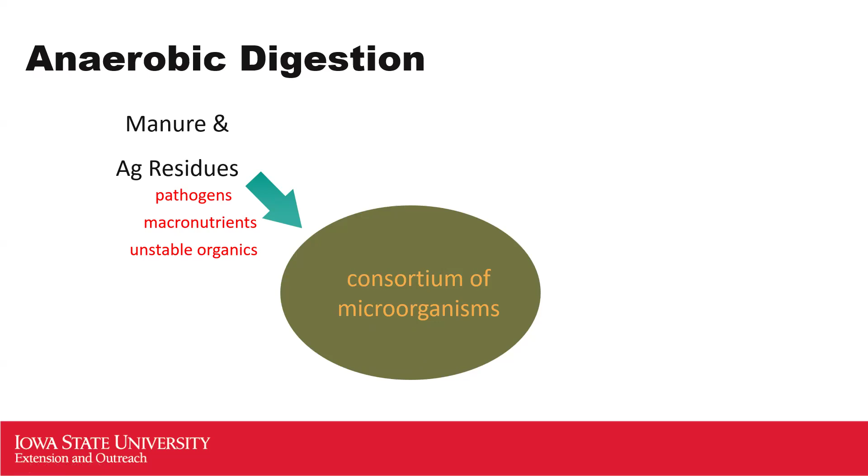So in manures, that might be things like pathogens or macronutrients like nitrogen, phosphorus, or potassium. But it's really that unstable organic matter, that carbon, that's of most interest to us. And that's really the input. And what we're trying to do is put it in a tank and store it in a certain way that limits air intrusion. So we don't want oxygen in there, essentially. And then we need to get a population of microbes that can do their stuff on this and break it down.

And what comes out then is something that we'd call treated effluent, right? And in many ways, it's not that different from the manure we start with. There'll be less organic matter, less carbon in it. But for the most part, the nitrogen, phosphorus, and potassium that we start with pass right through. And that's both a blessing and a curse, right?

If we were thinking about, can anaerobic digestion change nutrients on my farm, right? Can it work as a nutrient treatment system so that I don't have as much manure to apply, or I don't need as much land? It's probably not accomplishing that goal for us.

On the other hand, if we're in the Midwest and we're thinking about manure as a fertilizer product, treating it through an anaerobic digester doesn't do much to reduce the fertilizer value, right? It still has all that nitrogen, phosphorus, and potassium. And what it's really done is move some of it to be more available right away when we take it out of the digester. And that can be an opportunity for us.

The other thing that we tend to see is it's a great tool for reducing pathogens in the manure. And that's not something we tend to regulate on, but it is something that I think people are concerned about. Where are these pathogens in the manure? What's the risk to people or the environment? And having something we can do on farm to reduce that number can be beneficial.

I've been working on some research projects here with antibiotic resistant bacteria, and we see a similar trend that treating in an anaerobic digester, for whatever reason, seems to lower the amount of antibiotic resistant bacteria that remain in the manure. As I mentioned, it's still nutrient rich, or at least as nutrient rich as it was.

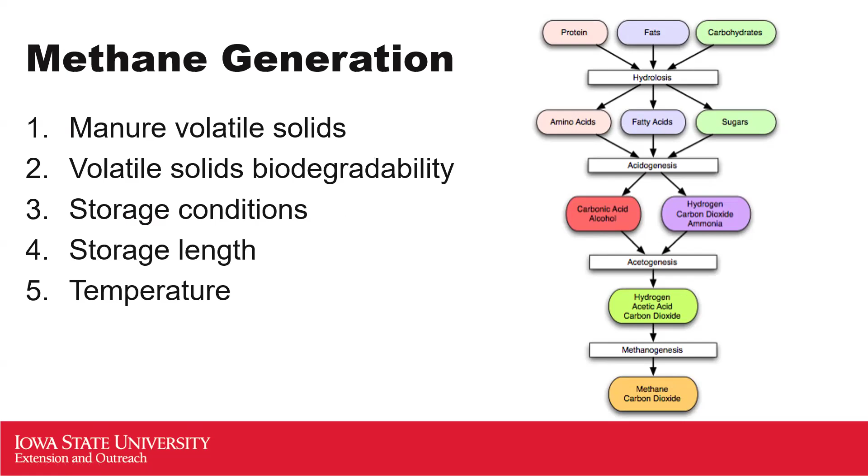I wanted to cover some processing advantages and maybe some disadvantages of anaerobic digestion. And the first one is that it can be messy, right? So non-sterile reaction vessels. And you might say, well, that doesn't sound like a huge advantage to me. But if you work in the world of manure, it really is, right? It's loaded with bacteria to start with. And thinking about getting to a pure single strain is extremely difficult. So when we compare what we're doing with maybe something like ethanol production, where they have that single strain and they need sterile reaction vessels to avoid off products, well, we don't have to do that, right? We can take dirty stuff and really get that treatment.

Another big advantage we have is automatic product separation. So when we see some of those ethanol plants and they're doing distillation and have big columns and need to add lots of heat, we don't have to do that necessarily, right? The gas, that methane, is basically insoluble in water, so it's going to naturally off gas from that material, and we get this natural product separation. Now, if we want to make it pure enough to put in a pipeline, certainly we have to do some post-processing of that gas, but at least our initial separation is relatively simple.

And the other thing that I think has historically been appealing is its relatively simple equipment and operations. Now, certainly there are things that can go wrong. I'm not trying to say it will always go perfectly, and there's definitely things that we can do to optimize the situation. But it is a process that occurs naturally. In a deep pit barn, where our swine manure is falling through the slats stored in that pit, there is methane coming off of that manure continuously. So really, when we say, can you mess up a digester?

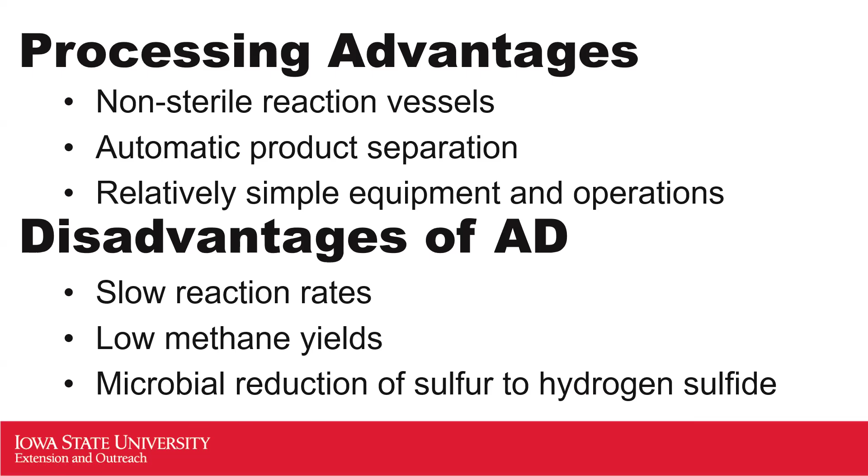And then the last one is really turning that sulfur into hydrogen sulfide. Mostly that tends to be an issue in terms of treating and removing that hydrogen sulfide. There are some safety risks associated with hydrogen sulfide and confined spaces, so it's something we have to be aware of. But really, from an operation standpoint, the risk is more: how do we get it out of the gas and get the gas clean enough to use?

I promised you a little bit on process and how long it takes, and just a couple to compare it to. So if you think about traditional corn grain ethanol fermentation, that's about a 2-day process, give or take, right? So relatively quick. If we think about making biodiesel, that might be a 2-hour process, so again, super rapid. In terms of anaerobic digestion, a much slower fermentation, if you start with something really easy, like a sugary wastewater and a sophisticated digester, you might get your reaction time down to the order of 8 hours or so.

If we start talking about how long it takes manures to digest, we might be in that 20 to 100 day window, with 20 to 30 days probably being what we've typically chosen. As we think about alternative feedstocks, for example corn stover or prairie grasses or cover crops, we have much less experience in that. Some of those products might take more time to degrade depending on the makeup of what's there.

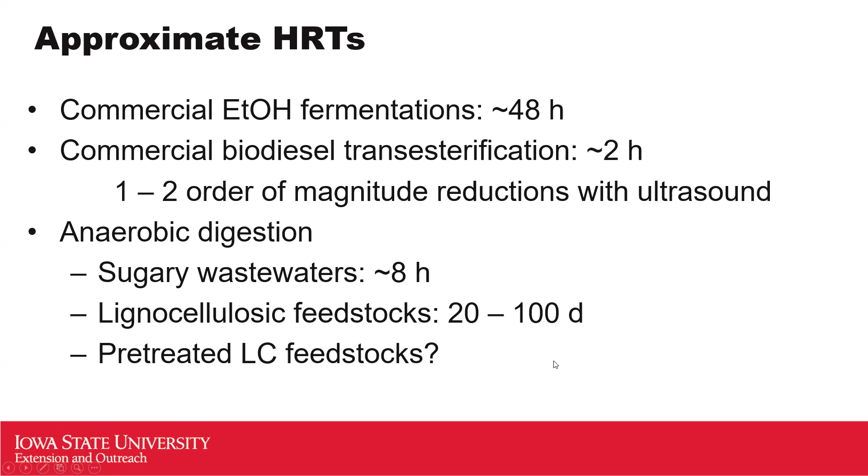One of the things you'll probably hear a fair amount about if you start studying anaerobic digesters is we have to figure out how much gas we're going to make. There's a couple ways to do that, but one of the most common is something called the biochemical methane potential. Essentially it just measures the digestibility of a substrate. So you start with some inoculum, which is a fancy way of saying, hey, I have this anaerobic digester and I took some stuff out. You make mini reactor vessels, put a small amount of whatever substrate you're testing in, and then somehow measure the amount of gas and methane that you're making, right?

We had a question: are there environmental issues with H2S in the gas? Don't you want to keep the sulfur in the liquid? We'd love to keep the sulfur in the liquid, and there are some ways to do that. I mentioned one earlier. You can bleed in small amounts of oxygen or air to try and reoxidize that sulfur and put it back in the liquid.

And then there's some other ways to treat it. One that's relatively common is using an iron sponge on that gas cleanup side. So the sulfur essentially reacts with the iron and we can pull it out of the gas. We really don't want to off-gas H2S if we can help it on our processing system.

Certainly, when we've looked at cropping systems in Iowa, there's a demand for that sulfur, right? So we often talk about nitrogen, phosphorus, and potassium, but sulfur is the fourth most valuable compound in manure. So we want to keep as much of it in the liquid as we can. And even though I'm mentioning hydrogen sulfide and saying there's issues with it, when we think about what fraction of sulfur is coming out as hydrogen sulfide in the gas, it's still actually relatively small.

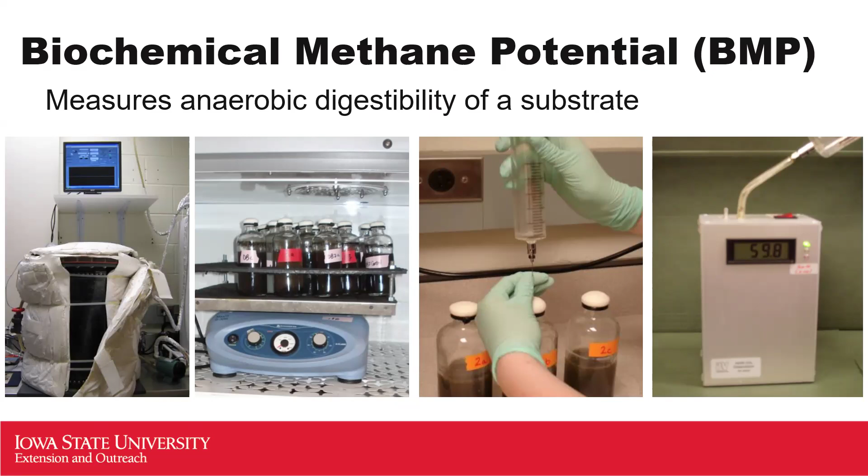There are some government reporting if you're a non-agricultural entity on hydrogen sulfide emissions, but absolutely, people are trying to keep as much of it in the digester liquid as they can and minimizing what's in the gas, because cleaning it out of the gas can be a more expensive part of the cleanup process.

I wanted to give you an example of what you can learn from running some of those BMPs. So this was just a swine feeding trial we did here at Iowa State. We fed 3 different rations. So that's sort of what that middle designator would be. SBM would be corn soybean meal rations, right? So that would have been what we considered a typical ration before we had distiller's grain.

Corn DDGS, that would be corn with the distiller's grain in the ration. And then corn SH would be corn with soy hulls as a ration. Not as common, but in that case, we wanted to see what fiber was doing. So we fed a different fiber relative to that corn distiller's grains. The designator on the end is just a designator for how we were grinding the diet, either coarse, which is about 700 microns, or fine, which is 350 microns. And really the swine industry has moved towards that finer grind because it improves feed digestibility by the pig.

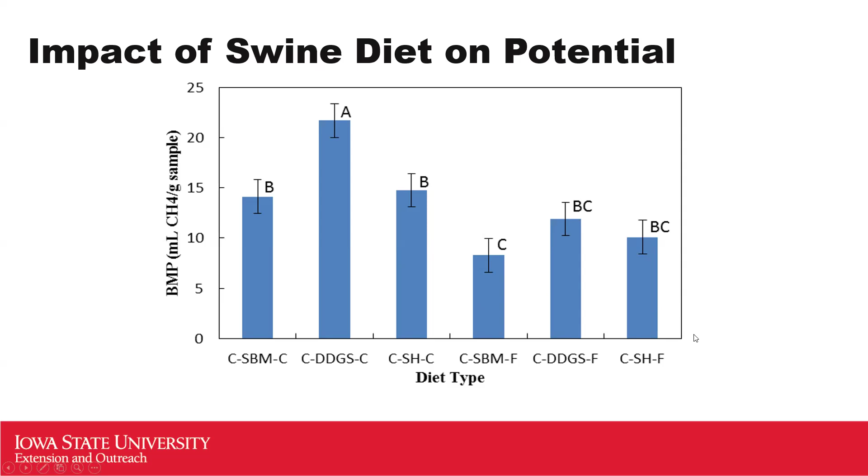And what I wanted to illustrate here is a couple things. One, feeding distiller's grains, right, tends to increase the amount of methane potential we have in swine manure. The other thing to note is that by grinding finer and getting better digestibility in the pig, we end up with less in the manure, right? So it's certainly, if we're feeding pigs, that's what we want. But if you're showing up and saying, I want to run a digester on this manure, how much gas am I going to make? As we do better with pig performance and feed improvements, we're probably going to have less potential coming out of that pig in terms of what's left in the manure.

There's another way to do it, and for a first really quick test, chemical oxygen demand is something that you can get many labs, commercial labs, to run for you. And we know that for every kilogram of chemical oxygen demand that you can break down in an anaerobic digestion process, you should make about 0.35 cubic meters of methane. So if you want to say, do I have a material that this even makes sense for, that's often a good place to start because it's a quick, easy test.

The art really is in estimating how good we're going to do in removing that chemical oxygen demand during treatment in a digester. And that answer is it depends a lot on the quality of the organic material in it. If it's sugar water, you can probably get most of it to break down. If it's really lignocellulosic material with a lot of lignin, we aren't going to do as good a job of breaking it down. And that's where that biochemical test really can come in handy to help know a little bit better.

And then I wanted to just show a few pictures as we got started. We'll hit these a little more in detail on our integrating on the farm. But there's really basically 5 processes that we're trying to handle, right? And that's feedstocks, both getting them to our digester and making sure they're pre-treated appropriately, talking through some digesters, and then some back-end handling for what's coming out, both the gas and the liquid.

So as we think about layout on a farm and what we might be doing, this will certainly depend on what your farm looks like and your overall goals, but we might need something for our storage of other materials coming in. We have to somehow get our manure into this digester, depending on what we're adding, especially if we're adding other materials. We might need to do some post-separation, right, and generate some of the solids and liquids and keeping them separate, have to store the liquids somewhere.

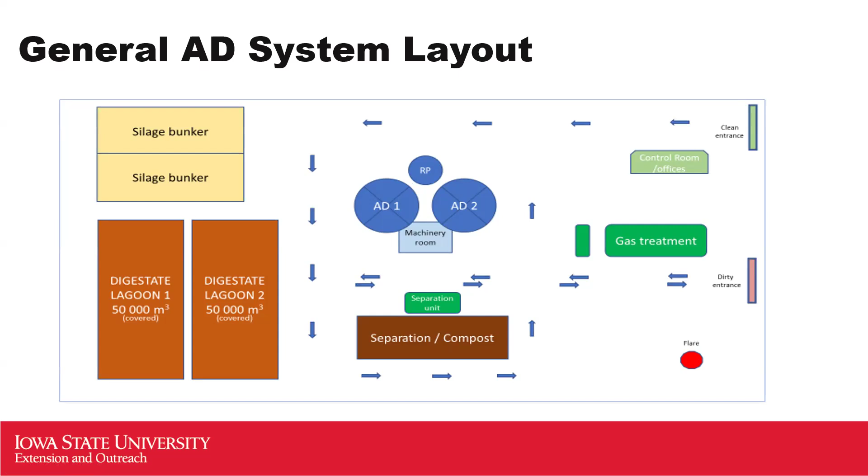And then it separates the HRT, that hydraulic retention time, from the SRT, or the solids retention time. And really what we're trying to do in a digester is keep the organic matter in it as long as possible to give the bacteria more time to break it down. And in many ways, separating that hydraulic retention time and the organic matter retention time can be beneficial, right? We're going to keep the organic material in and let that water come out. The big disadvantages here are it's relatively slow conversion.

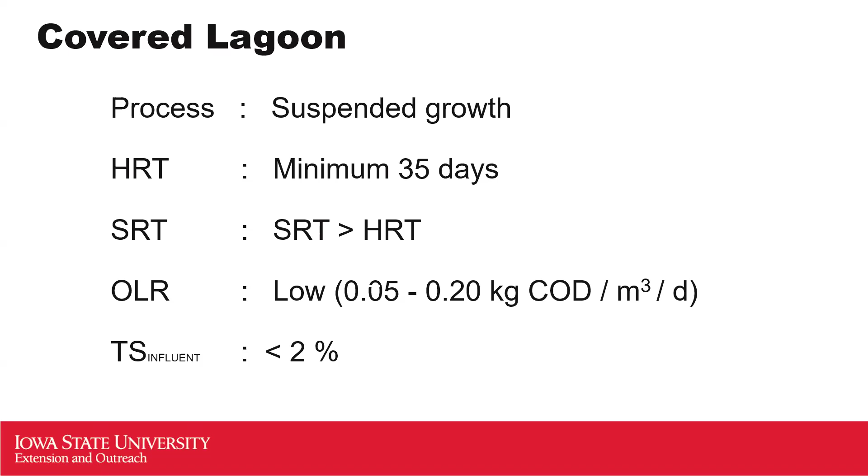agitated in it. The big advantage of these is we start to work with things that can have higher solids content in them. Generally, we think of up to around 10%, maybe to 12% solids, depending on the type of mixing you're using. And these have seen a lot of industrial or municipal use application.

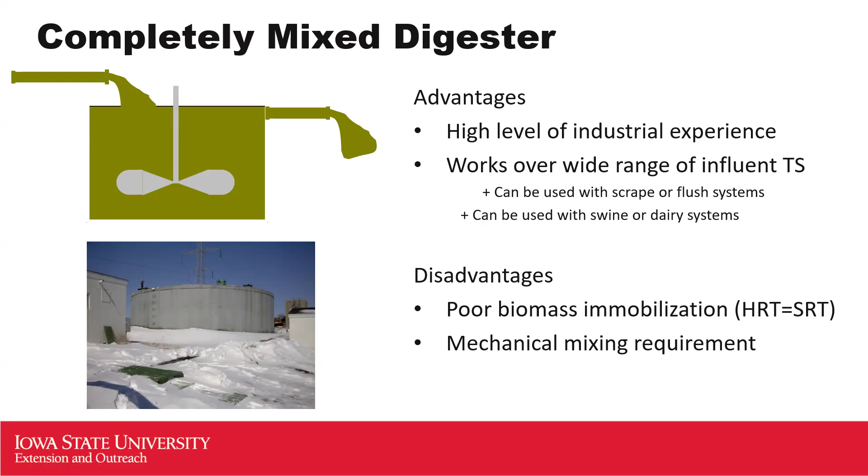The disadvantage here is we do a relatively poor job of biomass immobilization, right? So we don't want stuff to settle out. We're trying to keep it mixed up there so that the whole reactor is more productive in making materials. And that tends to make the hydraulic retention time and the solids retention time exactly the same. So we don't get the advantage of separating the liquid from the solids and building our reactor a little smaller.

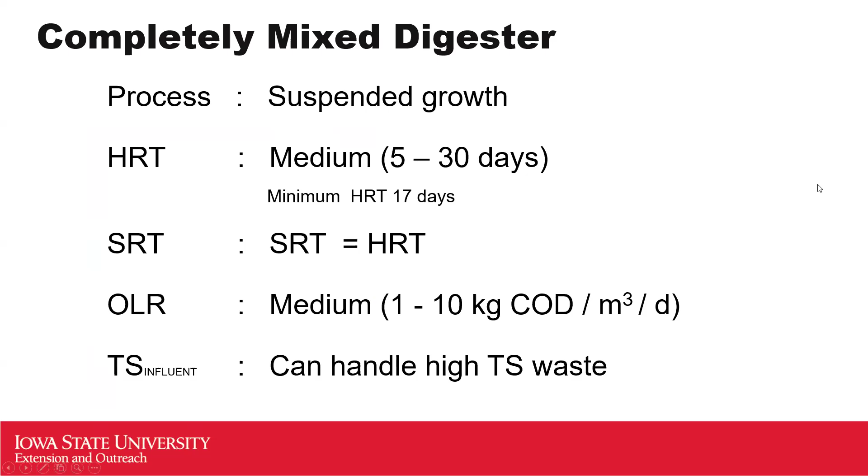They do tend to be heated, and that means we need shorter times. Probably 17 days or so is about the minimum you could potentially run a completely mixed reactor on, with somewhere around 30 days being the longest you'd probably run it on. They can handle a higher organic loading rate, which is a good thing, right? If we're loading it harder, we can get more gas per unit volume. And they have been one of the more commonly installed digesters on agricultural systems, especially as we move north where heating is required.

So they have a good track record of being used in agricultural situations, especially with scrape manure systems where we tend to be a little bit more on the thick side. They do require a thicker manure. If you think about putting sand particles in water, they're going to fall through relatively quickly. If you would take those same sand particles and put them in something like ketchup, that's a lot thicker, we can keep that material suspended much longer, right? So that tends to be what we've been trying to do.

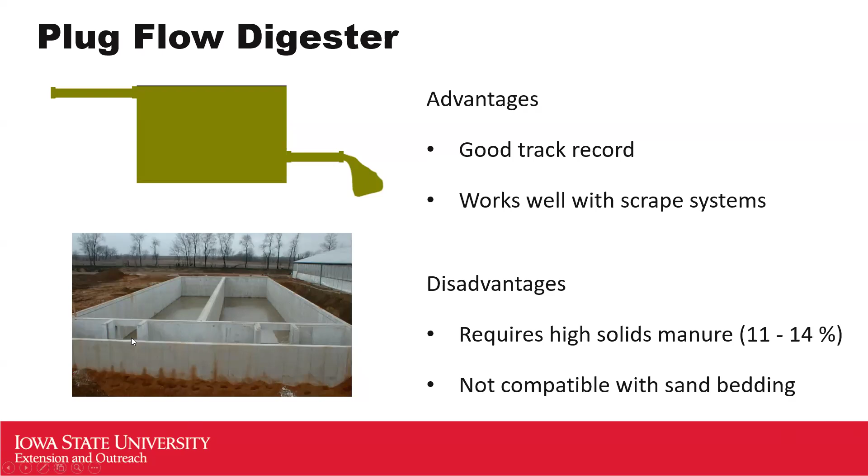And you say don't use with sand bedding. That seems strange after I just used sand as my example. Sand is not ever going to be our friend in a digester. If you are using sand, people often add some transverse mixing, so mixing along the way to try and resuspend some of those particles, and that is sometimes necessary. Sizing of material going in beforehand is really important if you have a digester where it has to get through some of these weirs and turn corners. Otherwise, you might see some plugging issues.

And then the last thing I wanted to point out before we turn it over for benefits of anaerobic digestion is just what efficiencies can you expect? For the most part, completely mixed and plug flow digesters in practice are somewhere between 70 and 85% efficient. So in terms of how much biochemical methane potential we start with compared to what they're making, that's generally a good goal to shoot for. Certainly you can do better or worse depending on your conditions, but that's typically where most of those would work. If you're using a lagoon style system, it's much more dependent on where you're at in the country. So we've tried to do some mapping of what you might expect.

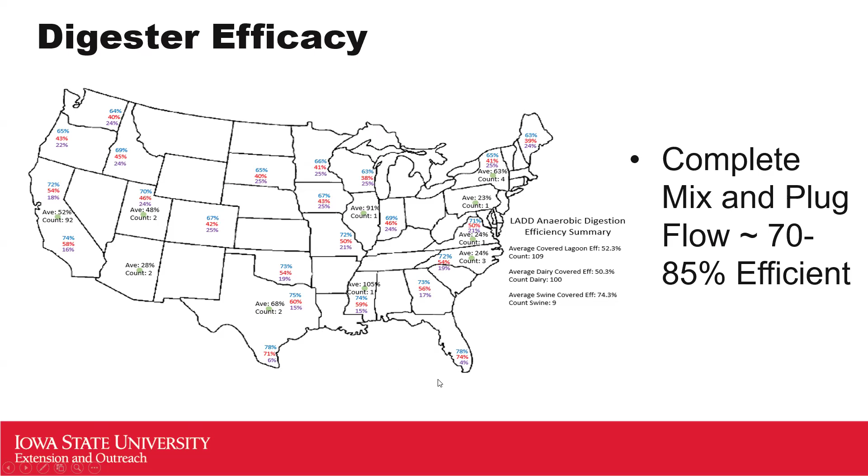So it does vary spatially based on region, and you can certainly do better or worse than that, but at least to give you an idea of where we're at, those would be some typical efficiencies that might be expected as you think about what digester would fit you well. With that, I'm going to stop talking for a minute and turn it over to Kapil, who is going to talk about some of the benefits from digesters.

Can you guys hear me okay? I can hear you now, Kapil. Yep. All right.

Thanks, Dan. So I'm Kapil Arora. I'm a field agricultural engineer here with Iowa State University Extension. I work in central and north central Iowa, covering about 20 counties, and have some interest in anaerobic digestion. So today I'm going to talk to you about benefits of anaerobic digestion, especially the environmental and economic advantages. We're just going to take a 30,000 foot elevation look at these just to get everybody on the same page.

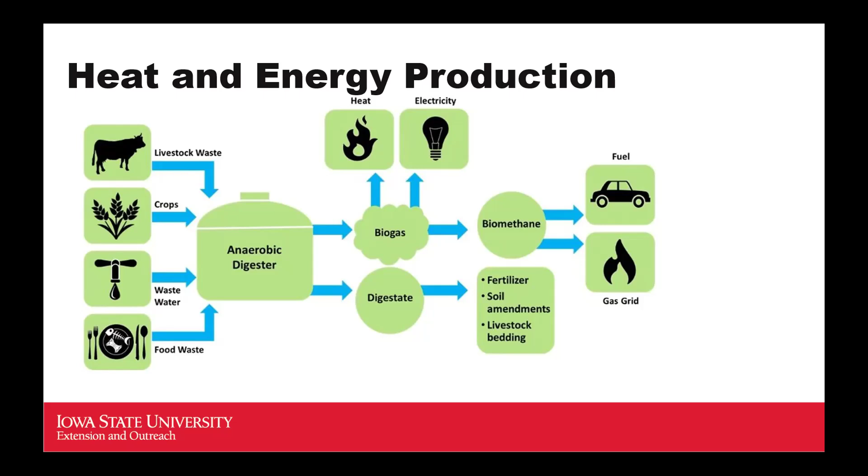And digestate is one thing that will come out of the digestion piece and can go back on the land as fertilizer and soil amendments, and the solids, if they are clean enough and don't carry any disease elements, can be used back as livestock bedding as well.

Reducing the carbon footprint is one of the main questions around anaerobic digestion. Just to give you some background, livestock globally is producing about 15% of anthropogenic greenhouse gas emissions. Manure management comprises about 5%, and they don't look like large numbers, but if you look at what some

of our large food producing companies here in the US have pledged, Smithfield is at 30% reduction of greenhouse gas emissions by 2030. JBS Foods is actually 30 by 2030, but net zero by 2040. Nestle is 20 by 2025, 50 by 2030, and net zero by 2050.

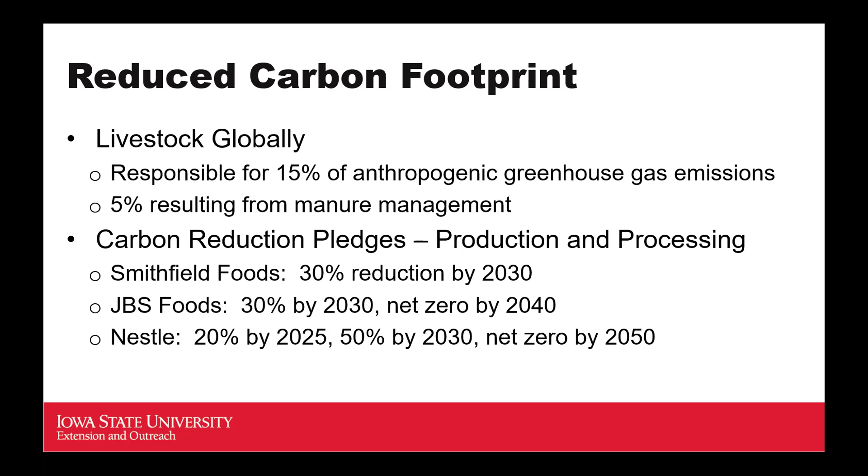And if you just look at manure as 5% of that 30%, that's almost 1/6 of what they are pledging. So 5% may not look like a big number otherwise, but out of their total pledges, it becomes a relatively bigger number. Where is this footprint? Just giving you an example of swine.

If we are managing manure in outside lagoons, our methane production per head per year is around 22, 23 kilograms. But from that storage, we are also getting nitrous oxide, which is around 0.2. And for both of them, the equivalent carbon dioxide is 625. You guys can do this math yourself.

Also, typically, methane is used as 25 times the CO2 equivalent. So you multiply the methane number by 25, and then nitrous oxide is 298. I sometimes just use 300 for easy figuring. If you switch the storage system to deep pits, the methane production does go down, and it's further reduced if you got a bedded pack.

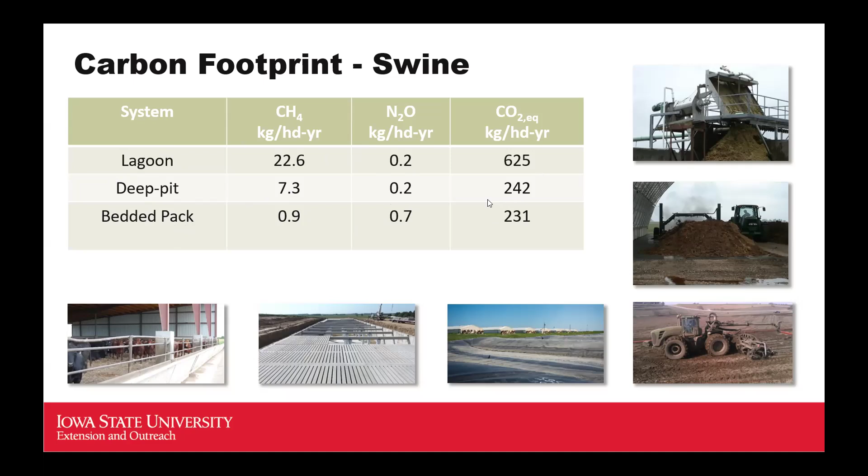So based on what kind of manure storage system you have, its carbon footprint is different, and it's going to produce different CO2 equivalents from both methane and nitrous oxide. Bedded pack does actually increase the amount of nitrous oxide being given off those manure packs.

If we actually get down into pounds that is fed to an animal, and we're just giving you a swine example here for a wean to finish pig, and you take in how many pounds we are feeding that pig total per day or on a given time period, we can actually calculate out what is the amount of methane that is being produced in a lagoon if that is our only storage methodology.

There's enough research done on concentrations coming off of these lagoons and analysis on manure that is being fed, where there's fairly good confidence in these numbers. We're almost producing around 27 pounds methane as carbon going up from a manure storage structure. We definitely are producing 12.5 pounds of CO2 as well through the microbial respiration that's happening in the lagoon.

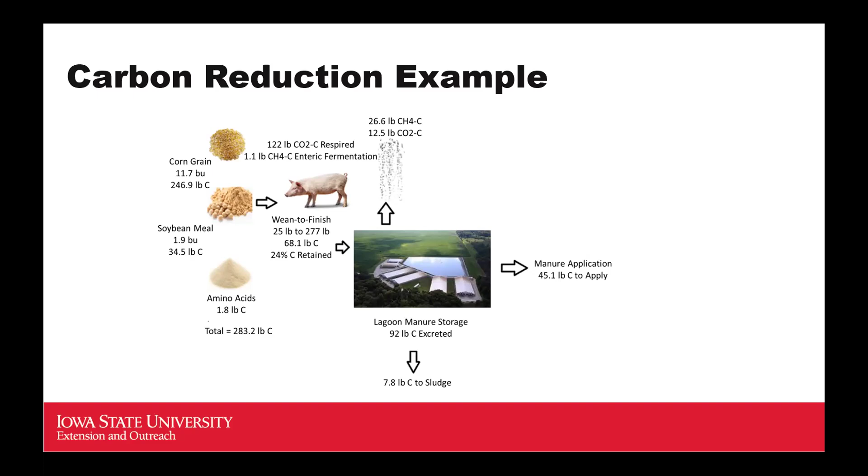But if we take the same system and now actually put up a cover on top of that manure storage structure and capture the methane, given the way these covers work, there is some leakage through them, but we are able to capture almost 25 pounds methane out of what was otherwise just gasifying up to the atmosphere. So that's a pretty good capture on the methane just by getting those lagoons covered.

And then from there on, the digestate can then go into another storage structure where it is stored till it is land applied. While it is stored, there is some pass through on the carbon down into that storage structure. And we do get some methane come off of it too, but not as high as if it was just straight manure going into a manure storage lagoon itself. So there are reduction potentials that exist. Yes, definitely the cover is going to cost.

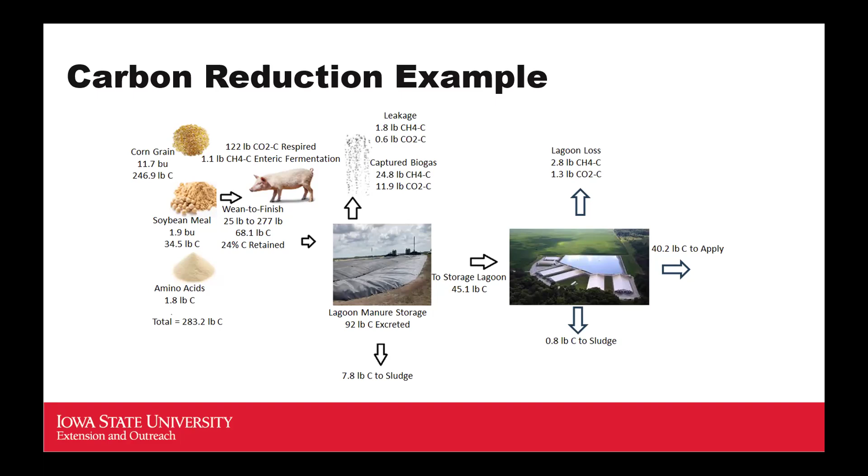But as we go through this digestion, a few things on nutrient management that come along is digestion is going to increase nitrogen availability. Some of those proteins, amino acids are going to break down and become more readily available nitrogen forms. So when we look at this effluent, it is a complete fertilizer, but not necessarily a balanced one based off of what the crop uptake is.

Since the nitrogen availability is going to increase, timing does become an important factor with it. We want to make sure manure is applied correctly, it's distributed out properly, so it's used up, but more into springtime application or applications closer to when the plant actually is needing that fertilizer.

There's research going on here in the Midwest where we are actually looking at applying liquid manures and digestates to growing crop, especially corn, and utilizing the same nutrients over more acres.

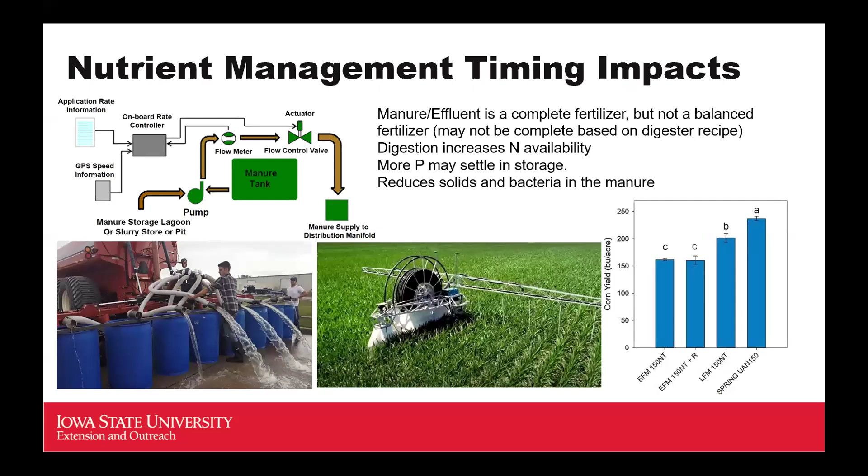As we go through this process, there are more costs that we have to cover. Definitely, lagoons are going to cost, and then methane capture equipment is going to cost. But there are revenue generation opportunities also. There can be tipping fees that can be looked at. There is money if we are actually producing energy from the direct sale of that energy. And if we are selling the digestate out for fertilizer, there can actually be income generated off of that digestate

as well. In the market, definitely there are carbon credits, RINs, and as we are avoiding methane production and nitrous oxide production, we can actually get some of these credits. Carbon credits are out on the open market through different registries. There are people working, and I think there's a few on our call here as well, who are working with projects to get these carbon credits registered, verified, and then working with large production houses to help them meet their commitments on reducing their carbon footprints.

These exist for just capture of methane and just flaring it, but then they're different for energy production versus if you are doing compressed natural gas and injecting it into the pipeline. EPA is running the Renewable Identification Number System, the RINs, and they basically are offering D3, D5, or D7 RINs based off of how the project is set up. But definitely there is revenue in carbon credits.

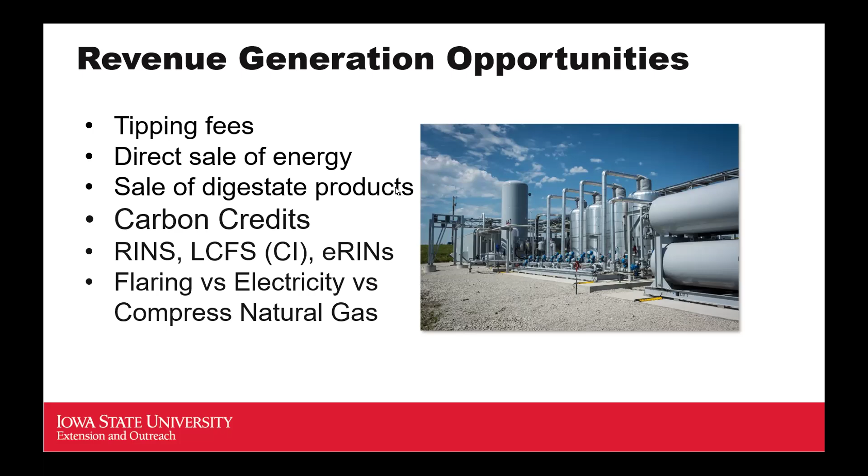Digestion can also come into play for odor reduction as well. If you've got open lagoons, that can lead to complaints and sometimes can be a nuisance to neighbors. And we have seen in certain situations where legal action has come into play. Where do these odors come from? Livestock by itself, about half odor units per pig space per second can be emitted. Manure itself could be another source. That's another half odor units per meter square per second being emitted, roughly around 3 meter cube per pig.

And what else can produce odor? If we are dealing with new materials into anaerobic digestion, some of the grasses and other biomass that we may add, we just do not have enough research or data available on what those digested solids at the end are going to be. In cases there have been reports that digested solids actually have more odors coming off of those than what the typical livestock and manure digestion biomass has at the end of digestion. But overall, anaerobic digestion does help reduce odors.

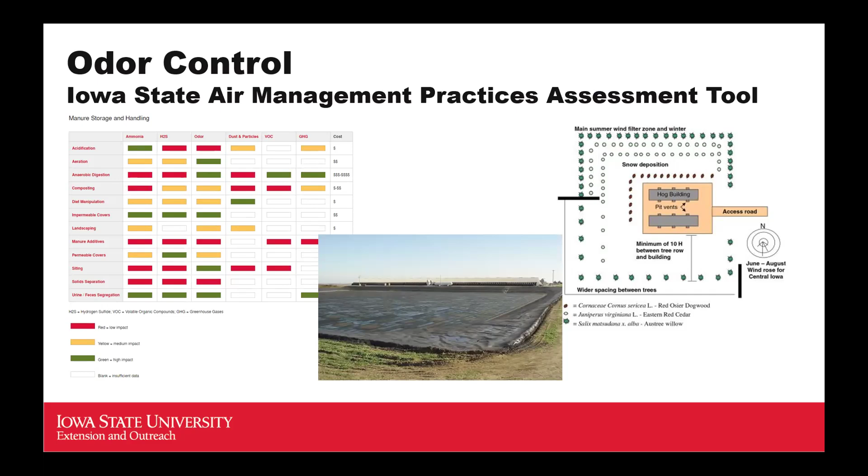We do have an AMPAT tool. This is the Air Management Practices Assessment Tool. It talks about different practices on manure storage and handling, such as landscaping, composting, aeration of the stored manure and storage structure, manure additives, permeable covers. And if you're interested in it, it gives you a ranking and lets you know under its 3 color codes whether it is low impact, medium impact, or high impact towards odor control. Pretty handy tool, has been used here several times.

So how does anaerobic digestion really reduce odor? It is basically taking those volatile organic carbons and shifting the chemistry, by the processes that Dr. Andersen was describing earlier, more into CO2, carbon dioxide, and methane production. So we are not going down the path of producing some of the highly odorous compounds which may get produced just by manure being stagnant or just being stored, where anaerobic digestion is not happening.

It does increase ammonia production as well as hydrogen sulfide production. So research is definitely needed on those pieces to help those things not be produced as much or keep them in the liquid part of things. And as that happens, we can put impermeable covers on top and capture the methane that's coming off of it. So one, by doing the digestion, we are changing some of that volatile organic carbon chemistry. And then by putting the cover on it, we are not letting the gases just discharge freely up into the atmosphere, thus reducing the odor transfer.

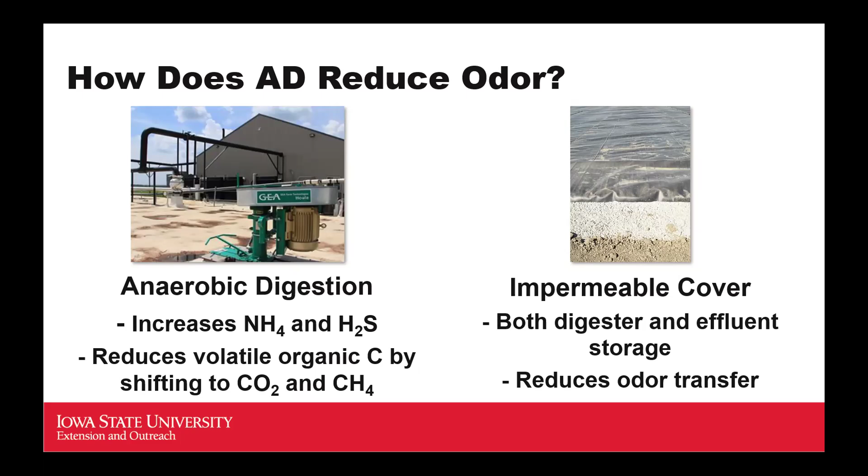The last thing I do want to cover here is we do have some soil health improvement benefits as well on the tail end of anaerobic digestion, where we have this biomass that's left at the end. It's mostly rich in lignin and other materials that cannot be easily digested, and it has the potential to improve soil organic matter. And we typically are looking at land application of this material. We can further compost it and maybe get into that phase. But if you have land readily available to you, you typically want to be land applying that, as that would be your least cost option.

There is research available. This on the right hand side is from Scottsbluff, Nebraska, which has shown that if we are applying more total carbon, a higher application rate does tend to increase the soil organic carbon.

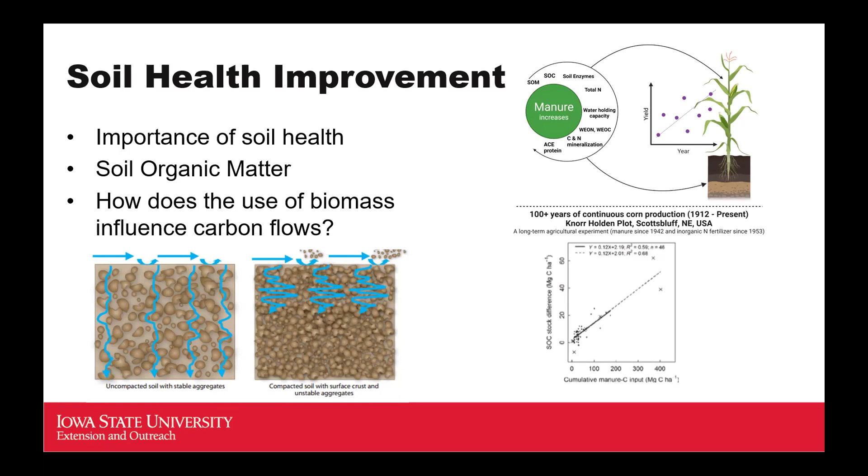Now, it does help in getting stable aggregates in the soil because you are adding soil organic matter, which is basically leading into more organic and humic acids, which tend to bind soil particles together, which in turn leads to better and stable soil aggregates, and thus improved soil health. Typically, we get more water holding capacity. There's more enzymatic activity in the soil itself, which overall leads to better plant health.

Digesters will influence how things are managed on the farm as well, because if we are trying to get biomass crops back into the digesters, we will have to allocate acres to produce those biomass crops, which can lead into changes in crop rotation.

And then on the tail end, if we are taking residue after crop harvest, in cases where there is too much biomass available, in the Midwest here, we are getting into high corn productivity where we do have a large amount of residue left at the end, and farmers are wanting to find ways to use it. So that stover at the end can be taken off and used up, but it will change how that entire regime exists and what that management strategy is.

And then in the end, instead of just applying manure, we are bringing that effluent back and applying it, which also is going to change the soil health components of the entire system. So overall, digesters are beneficial. They are a better environmentally friendly application. Definitely economics plays a big role in it. So just giving you a quick overview.